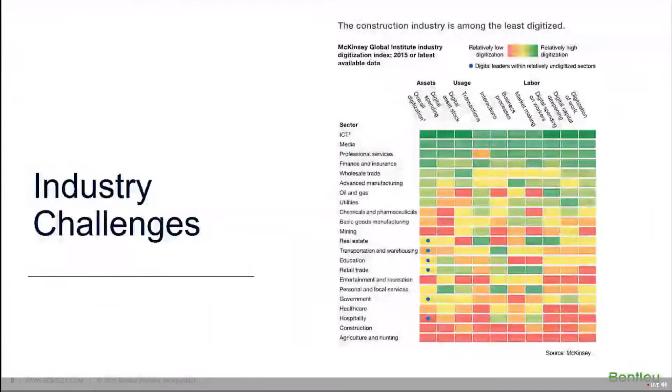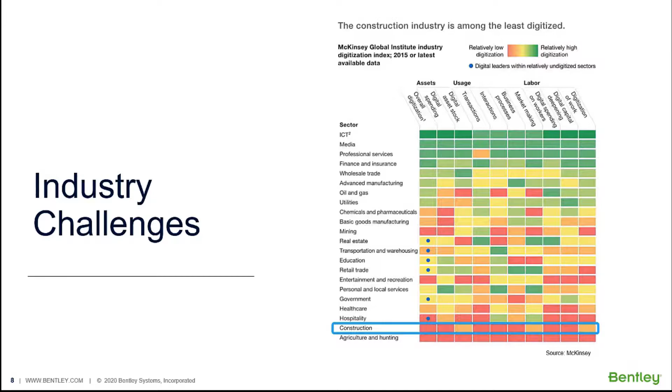The construction industry has been slow to adopt process and technology innovations and is ranked 21st among the 22 industries surveyed. The industry has not yet embraced new digital technologies that need upfront investment, even if the long-term benefits are significant.

Construction spending accounts for 13% of the world's GDP. It is believed that the lagging construction productivity costs the global economy $1.6 trillion a year, which is half of the world's infrastructure need. This means we could create double the infrastructure with the amount being spent.

How do we transform productivity and project delivery? Can technology help? In a report published by McKinsey, 5 big ideas are being talked about. Let's look at the ideas which are being touted to increase productivity.

The first one talks about the higher definition of surveying, which essentially includes photography, laser scans via UAVs to improve accuracy and speed. The second one is about next generation 5D BIM modeling, which considers project schedule and cost in addition to 3D design models. A 5D BIM platform can help owners and contractors to identify, analyze, and record the impact of changes on project costs and scheduling. The next idea is about moving away from the paper towards online, real-time information sharing.

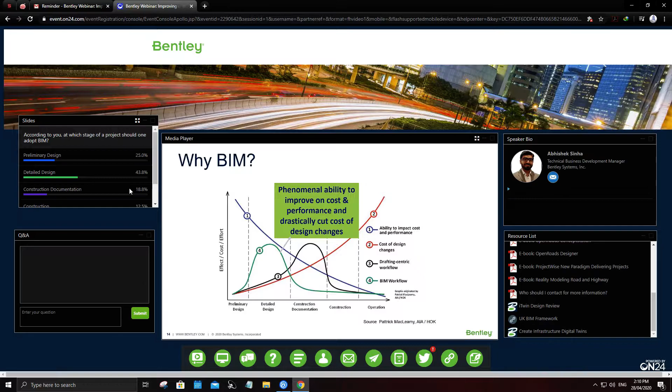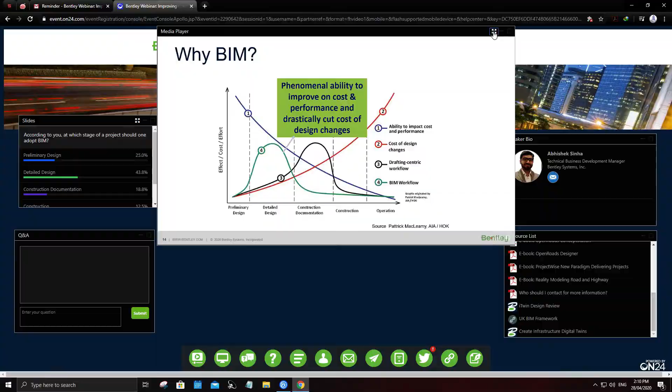To answer the question, which stage of project should one adopt BIM? We have an interesting graphic in front of us. Line 1 shows that if BIM is adopted right from the start of the project, it has maximum impact on cost and performance of the project. Line 2 shows how design changes impact the cost of project during different project stages. The impact is very high during construction and operation stage.

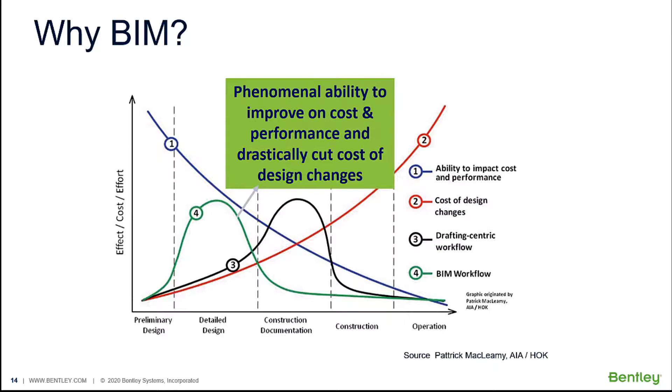Line 4 suggests that adopting BIM workflows helps in identifying design issues very early when the change impact is low, hence adding more value, whereas the drafting-centric workflow is inefficient in risk identification and may result in higher effort and cost. To give you another picture of how it impacts the project cost, let's have a look at how much we can save. Once BIM is adopted right from the planning stage, it can result in a 20% saving in overall capital cost and up to 80% of operational cost. This means 2 projects in the cost of 1.

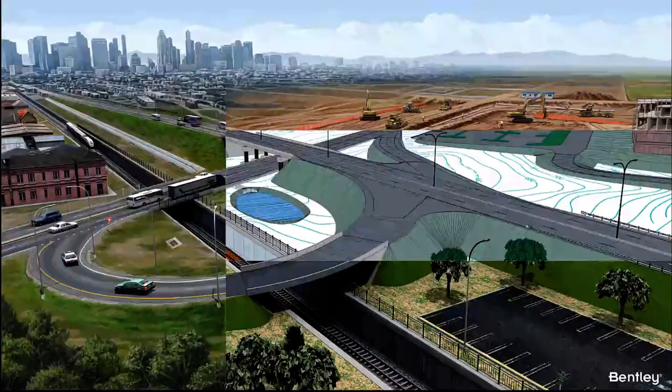This image shows progression of technology over the years. Our industry started digitization of drawings with the invention of CAD, then moved to BIM to gain value out of 3D models and asset information that can be stored within the models. Now we are here talking about digital twin as a successor to BIM. Let us understand what this progression is all about.

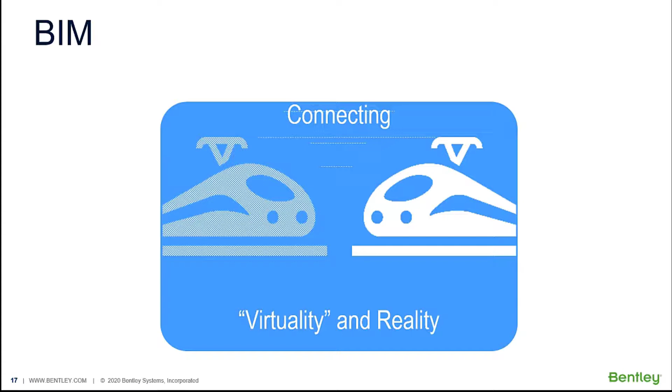When we talk about BIM, most of us understand that it is a 3D model with all the required model information which gets delivered to the client to be used during operation and maintenance stage. Well, it's true in a sense that we aim to create a virtual model before we create an actual model on site. But BIM also defines the standards and process that need to be followed in order to create and mature the information during the project lifecycle.

Digital twin, on the other hand, is a digital replica of the real world model, which means it goes beyond what BIM delivers, and the digital model is constantly updated so that it reflects anything and everything that happens in the real world. It's a dynamic model, a living model if I may say, which adds the dimension of time to the whole story. Typically, digital twins can be synchronized from multiple sources, including sensors and continuous survey, to represent their near real-time status.

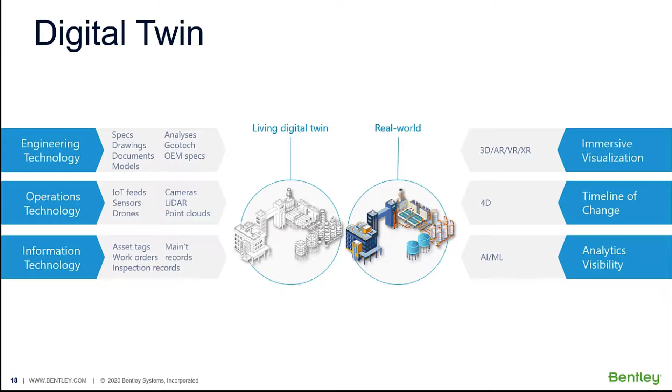Now that we have got the broader picture, let us understand how the BIM process helps in streamlining projects. During a traditional project delivery, information is created, shared, and managed in silos, and there is no single source of truth. This approach results in wastage of time and efforts to find the most relevant and up-to-date information at the right time. A digital project delivery system would solve that problem by using a Common Data Environment, or CDE, as a central repository, which has all the information and is a single source of truth.

Multiple stakeholders can create, modify, and use information from the Common Data Environment and collaborate, which improves overall efficiency. Let's look at the CDE process. During any project, information is created by multiple individuals, teams, and organizations using a variety of tools. CDE captures all that information in a systematic manner and then federates it to create an overall picture of the project. This federated model can then be validated to check for correctness and accuracy of the information created before it is published. All this while, CDE allows the stakeholders to collaborate and refer to other information in the funnel.

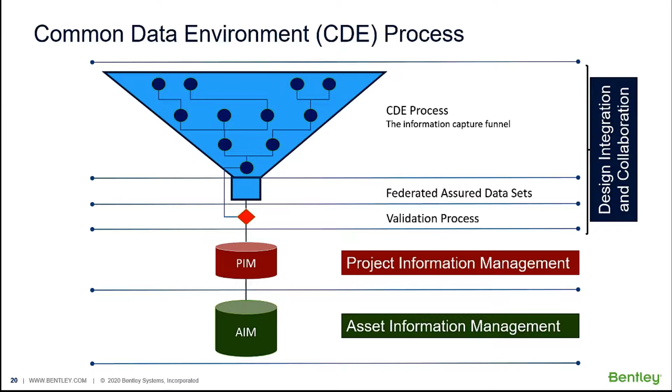Once there is a federated, validated model, it is then published for further processing in the project information management stage. During this stage, the information gets pushed through a defined process, and schedule information and cost information coming from other systems are added to the approved model and then analyzed. The last stage is all about managing asset information, which will help during operation and maintenance of the infrastructure.

UK BIM standards served as a guide for implementing the process we just saw. They talked about information collaboration, electronic data management, CapEx lifecycle management, OpEx lifecycle management, security of the data, health and safety, and better facility management. These standards are now getting superseded by BS EN ISO 19650. There is a plan for 5 parts, out of which 2 parts are already released, covering concepts and principles of BIM and CapEx lifecycle management. The other 3 parts will be published in due course and eventually replace BS standards.

Now that we have talked about standards that shall be used for BIM, let us have a look at the process in detail to understand how it works. Design integration, as you remember, is the first step of the CDE process, and it happens in 3 stages. During the work in progress stage, a file is created, worked upon, its content checked by the people within the discipline, and then it gets approved for sharing with others for further collaboration. During the next stage, other teams collaborate and review the project in totality to check for any possible clashes or risk, and once that is done, it is approved to be published and becomes the final deliverable to be shared with clients or external reviewers.

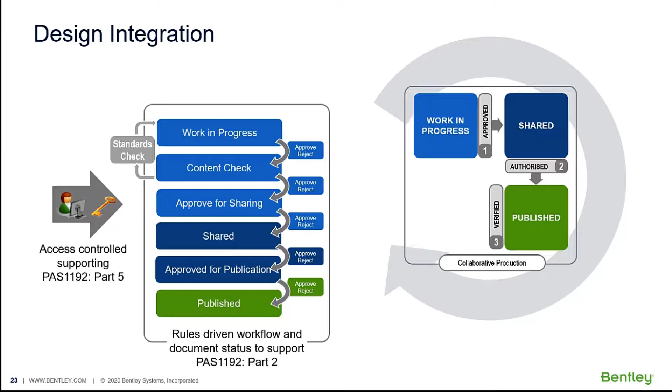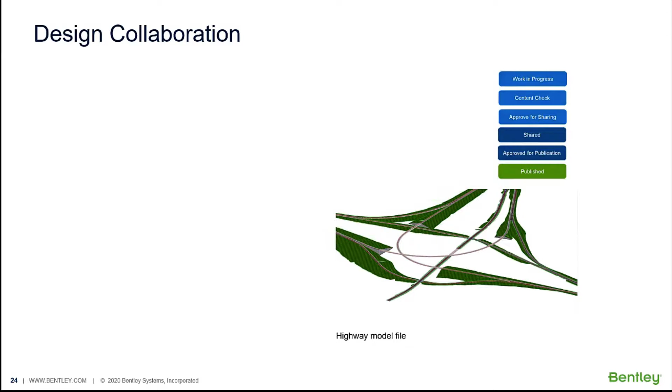All this while the data is access controlled, which means only read-only copies are shared with others for visualization and review purposes, and the owner of the file retains complete rights over the information created. Each discipline follows the same process, and CDE enables multidiscipline teams to then collaborate in a seamless manner. CDE ensures that the organization is able to follow a set standard. The engineering coordinator within each consultant organization collaborates various discipline outputs, which are geo-coordinated and federated to eliminate any surprises during the construction stage. This is where the model is reviewed and checked for clashes before publishing it for client review.

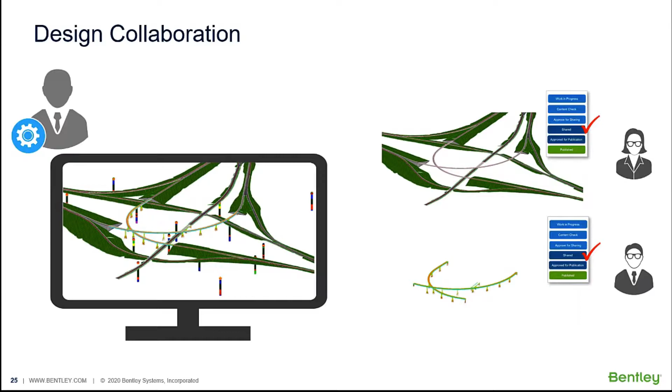The entire design integration, collaboration, submission for review and approval process happens within CDE. This here is an example of this process and can be configured as per the organization's requirement. The file gets created in the CDE and the designer then works on it. Once the design is done, the document moves through CAD checks and design review, and if it gets rejected at any step, it goes back to the owner of the document, which is the designer. Once approved, the model goes through rendition, where it gets converted into a read-only copy, either PDF or iModel or any other common exchange format, for review and comments.

The document controller of the production team will then package the documents and send a transmittal to the external review team. The document controller of the external reviewer team will then acknowledge receipt of the transmittal and share the documents with the lead reviewer, who in turn can share it with the relevant reviewers of his or her organization, and then collate all the feedback together. This commented document is then shared back with the production team to make necessary changes. This process will repeat till the documents are approved and then shared with the authority or the authority's engineer to get final approval.

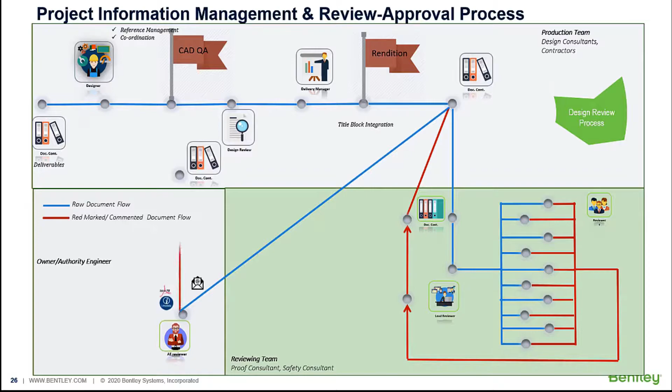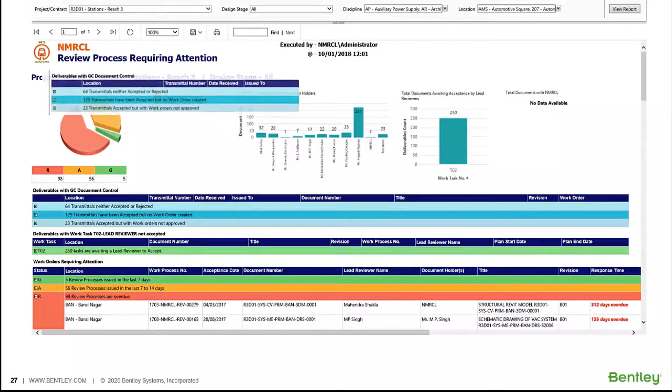Since the information is created and managed in a digital environment, project managers can get easy-to-use dashboards to keep track of project health. This example is from a metro project where CDE is implemented, and such dashboards and reports are helping in understanding the stage of the project at any given time.

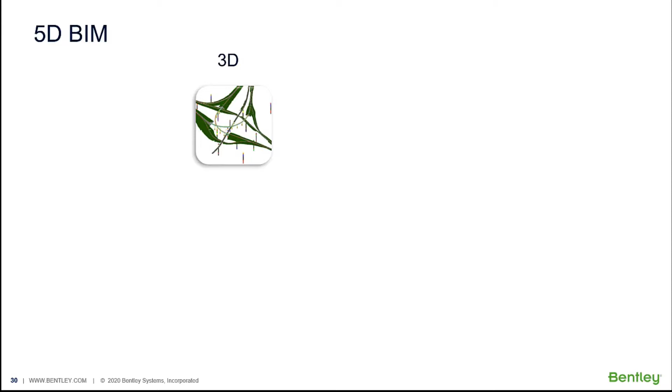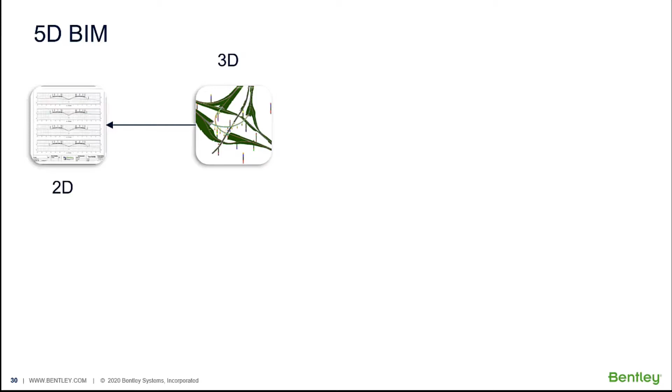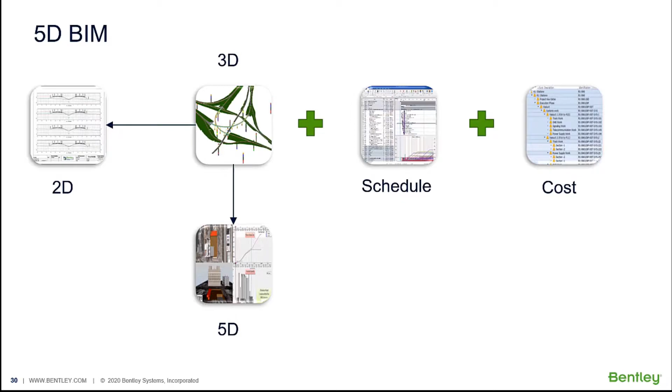Remember, one of the ideas that we discussed earlier was 5D BIM. We have already seen what the BIM standards are and how the process looks like. Let us have a look at how we achieve 5D. We start with 3D models of individual systems, create 2D deliverables, and federate and validate the 3D models within the common data environment. We can then add construction schedule from software like Synchro and Primavera, and cost from the organization's ERP system, to arrive at a final 5D model — time and cost being the fourth and fifth dimension.

Let us now have a look at the design integration and collaboration process in context of a highway project. We will explore a comprehensive set of design solutions and an integrated workflow for highway projects, ranging from surveying to visualization. All this design and review work happens within the common data environment.

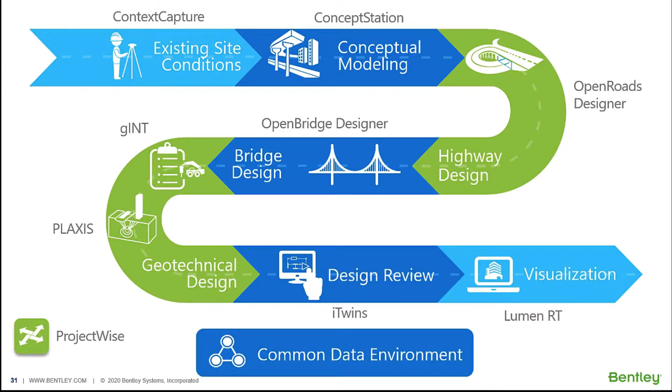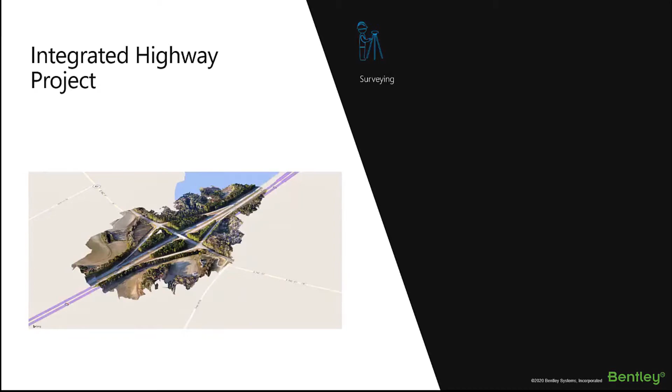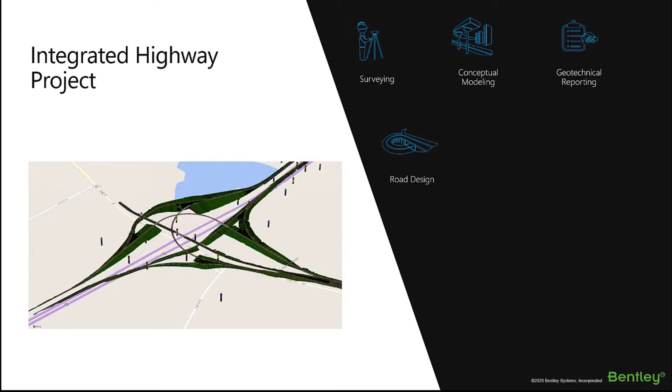We have created an integrated highway project to take you through the entire design lifecycle of the project. We have started by surveying a project site, then creating conceptual project models during the planning stage, taking it through the detailed design stage where we design highway and bridges. We also capture geotechnical survey information and then use it to analyze embankments and pile foundations.

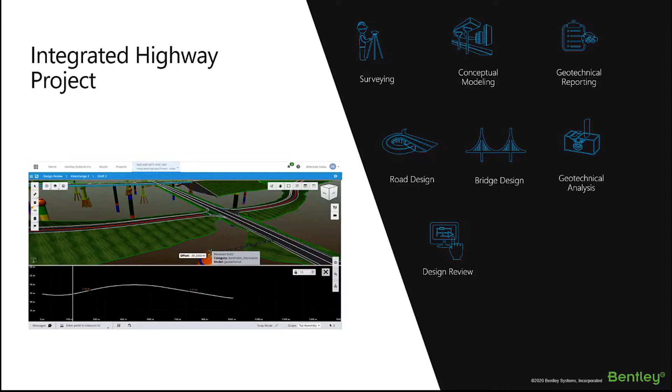Once the design is complete, we review the models and visualize the project. We have also set up a common data environment which will be used by respective engineers to work, and will give you a real feel of how the project is executed using CDE.

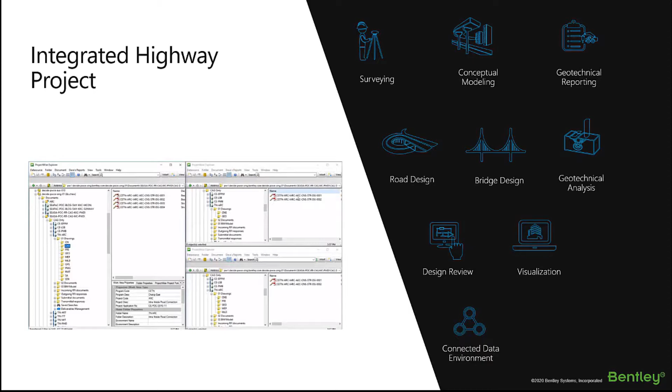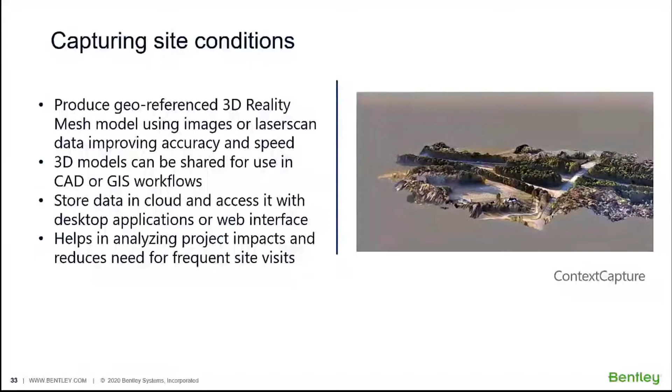During the surveying stage, we can capture photographs of project sites or do a LiDAR scan using drones. We can also use car-mounted or handheld devices. This data can then be processed in Bentley's ContextCapture software to generate a 3D reality mesh model. Since the devices are able to cover more area in less time, we can improve the accuracy and speed of the entire process by using this modern surveying technique.

The 3D reality models can be used in downstream engineering applications as a topo surface and to provide the designer with the contextual view of the project site, thereby improving design decisions and reducing errors.

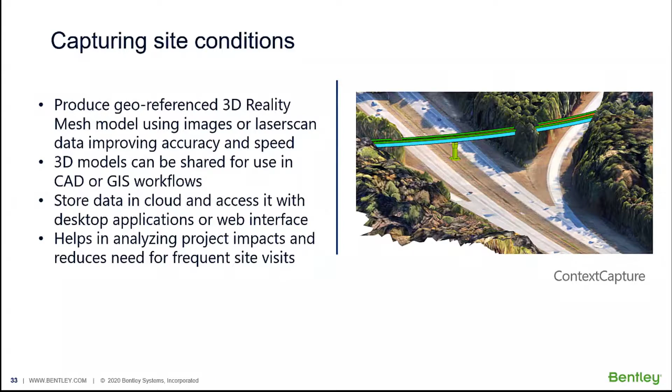We understand that such survey data can be huge, and it is not feasible for everyone to download or copy the file onto their computer systems. Bentley provides a cloud sharing option where the context data is stored on the cloud and can be easily accessed via web browser for viewing, or can be referenced in design applications without the need to download.

Since the engineers will be designing in real site context, it is easier to analyze the design impacts on existing infrastructure and check for any possible clash with existing elements on site. This also reduces the need for frequent site visits to take critical design decisions and can help in saving time and money for the organization.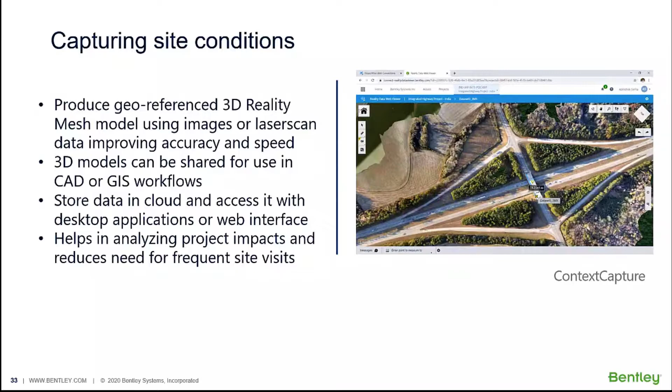During the preliminary design stage, we need to create multiple conceptual design alternatives and quickly compare costs.

OpenRoads ConceptStation allows you to conceptualize your highway project in 3D. The program allows you to download survey data for your site location or use your own survey data, including the ContextCapture reality model you just saw. Being a conceptual design software, it has easy-to-use tools which create parametric highway models.

It also helps in quickly designing challenging sections of a project, for example, a road junction or a ramp connection. It also allows one to place bridges on the fly by just selecting the start and end chainages of the alignment.

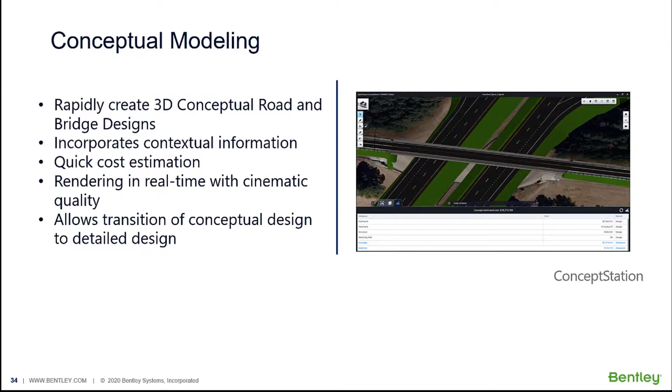Once the bridge is placed, one can easily modify the individual components to suit the design needs. Since the model is in 3D, the software can also provide a quick cost estimation for the entire project, and the designer can check the feasibility of multiple alternatives.

A conceptual model may also be required for client presentations, meetings, or getting approvals from authorities. ConceptStation allows use of the visualization tool LumenRT to create rendered images and animated videos.

Transitioning the conceptual design to the detailed design stage is a huge challenge for DPR consultants or owners' designers. ConceptStation allows the design to be exported to detailed design software so the highway engineer can start finalizing the design alignment without skipping a heartbeat.

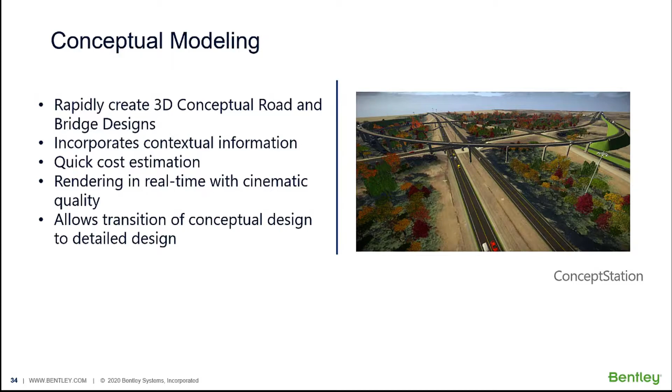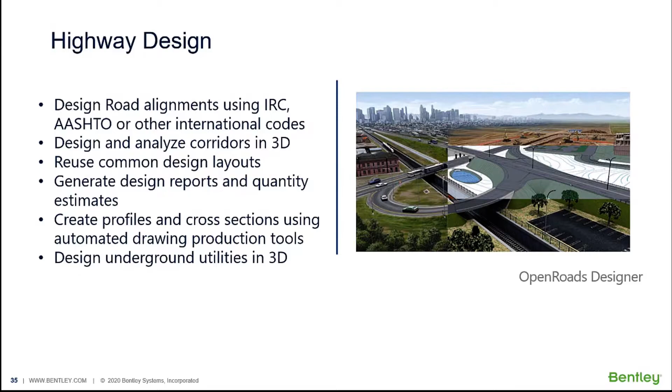Next, we move to the detailed design stage of the project, where we design highways, utilities, bridges, and do geotechnical analysis. It all starts with the alignment finalized during the preliminary design, and the same alignment can be further detailed.

In OpenRoads Designer, as an engineer, you will have to follow design codes based on the country your project is located in. OpenRoads Designer has IRC, AASHTO, and other international codes which are frequently used while designing highways.

OpenRoads is also capable of creating the road corridor in 3D using user-defined parametric templates. You may choose to add road markings, crash barriers, or other 3D and 2D elements as required to deliver the project.

One of the key features of OpenRoads is allowing the designer to reuse common design layouts like junctions, truck laybys, rotaries, etc. This saves effort and time required to keep repeating that design throughout the project.

OpenRoads also allows the designer to quickly generate design reports and quantities for all the components modeled in the project.

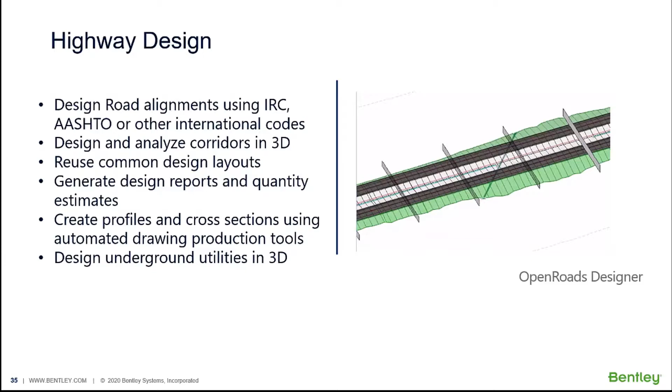2D deliverables are still required for construction activities, and OpenRoads utilizes the 3D model to extract all 2D drawings from it. The benefit of this approach is that the drawings are a live reference of the 3D model, and any change in the model will automatically reflect in the 2D drawings, reducing the drafting time required for making changes.

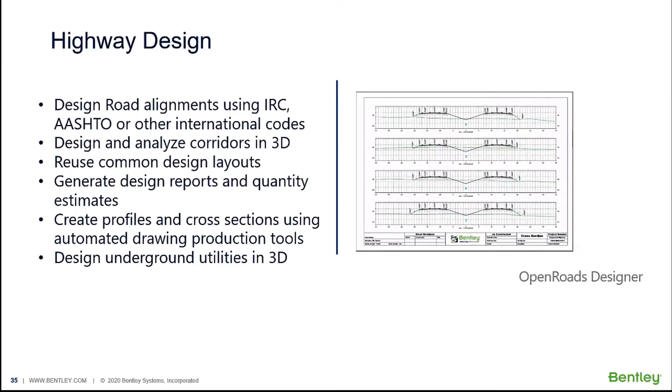It is very common for highway projects to have drainage along the alignment or other underground utilities like water lines and electrical ducts along the roadside, especially in urban sections. OpenRoads takes care of such requirements by including tools to model and analyze underground utilities.

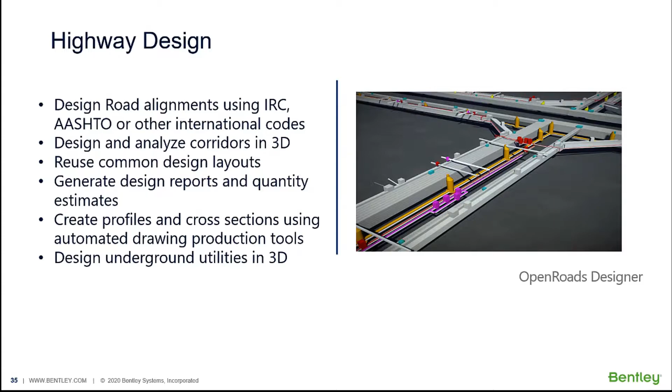One of the major challenges of the highway industry is using the highway design directly into bridge software. Bentley's open solutions integrate it all together. The bridge engineer can reference the road alignment in OpenBridge Designer and start modeling parametric 3D bridge models.

The topo survey can be used to automatically create pier heights, and the super elevation data coming from OpenRoads Designer can be used to slope the bridge deck. You can model the bridge in as much detail as required.

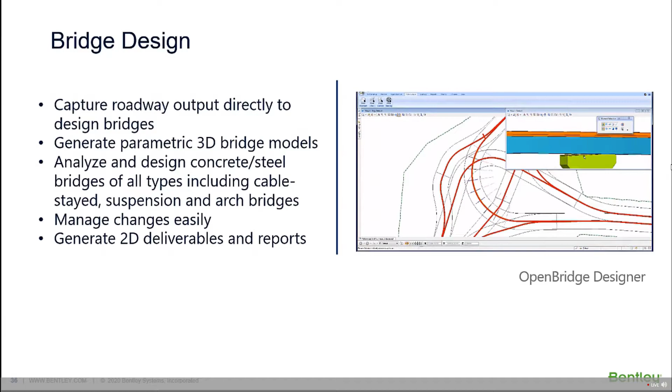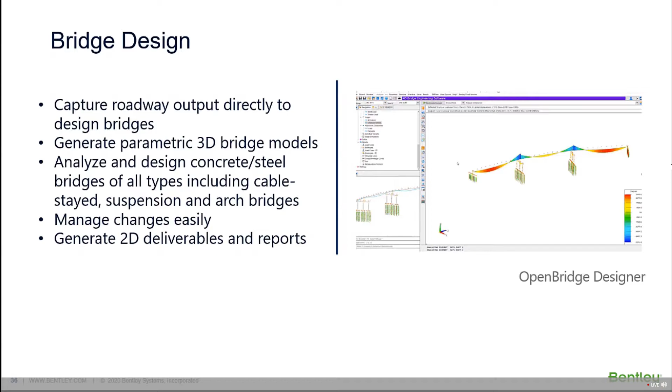Another challenge comes when 3D models of bridges need to be pushed to analysis modules. OpenBridge Designer comes equipped with an analysis module, which helps you analyze all types of bridges, including complex ones like cable-stayed and suspension bridges.

Since the data has a seamless flow from one discipline to another, or from one project stage to another, it is very easy to manage changes. For example, if the highway engineer changes the height of the alignment, it will immediately change the height of the bridge, which can then be quickly reanalyzed to check whether the bridge is still safe.

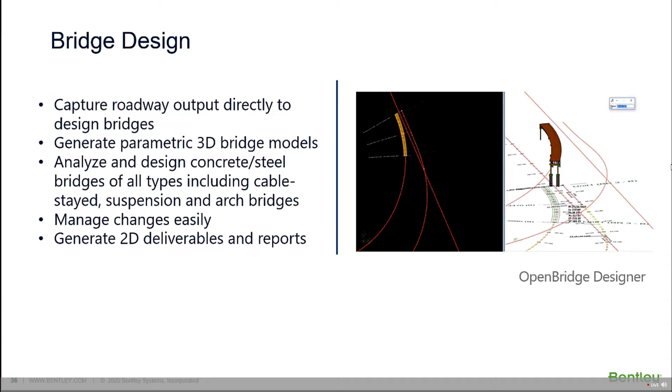OpenBridge also allows you to publish 2D drawings directly from the 3D model, which means any change in the 3D model will reflect back to the published drawings, saving a lot of drafting time.

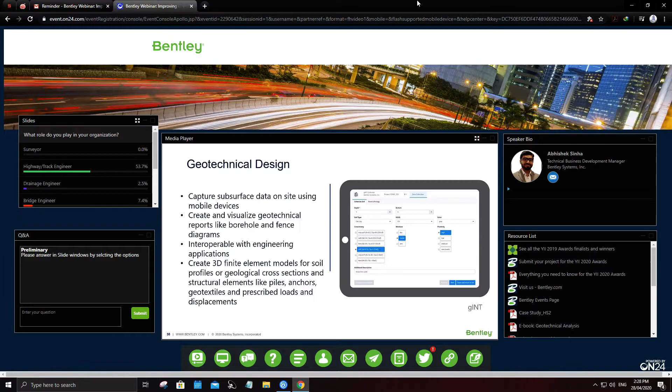Geotechnical design is one of the most critical aspects of any infrastructure project. Bentley has come up with a geotechnical data reporting solution, which allows digitization right from the site level.

The site engineer can record all the information in custom-made forms through a mobile or tablet, which then gets uploaded to the master database at the office. This saves a lot of time transferring data from site to office and removes duplication of work.

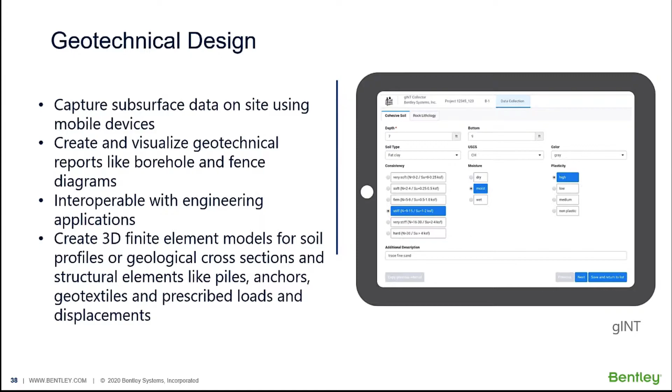Once the data is uploaded to the database, gINT can create geotechnical reports like borehole maps, fence diagrams, etc. This data is also interoperable with design applications like OpenRoads, so the highway engineer can create a surface from lithology data and use it to optimize the alignment and save costs right at the design stage.

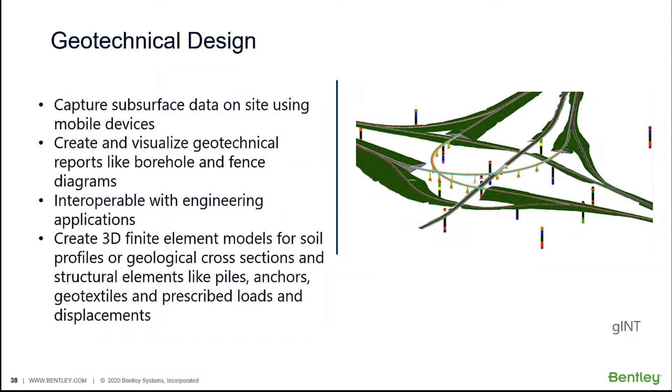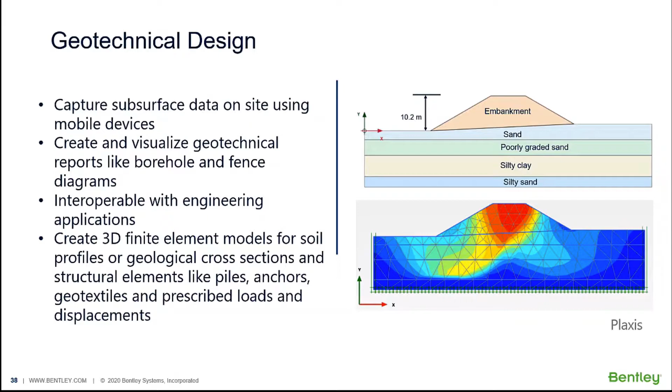Also, with all the soil information captured from site and lab tests, we can then use an analysis software like Plaxis to create finite element models for highway embankments, to check slope stability, and structural elements like pile foundations to check for settlements.

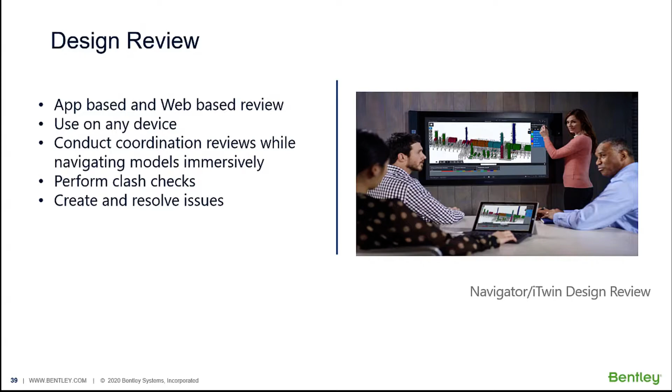Moving on to the next step in the project. Once each discipline engineer creates their own design file, it goes through a review process. The reviews can be done using Bentley Navigator application or through iTwin Design Review, which is a web-based service. Either way, it can be done on any device at any time.

The iTwin Design Review service allows multiple team members from different disciplines to collaborate on their design and perform coordination reviews online. It has the ability to handle third-party design models from most of the commonly used software in the highway industry. In a post-COVID world, this type of online coordination review might become the new normal.

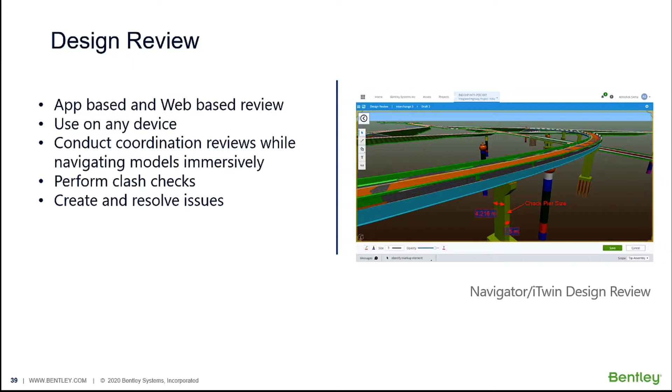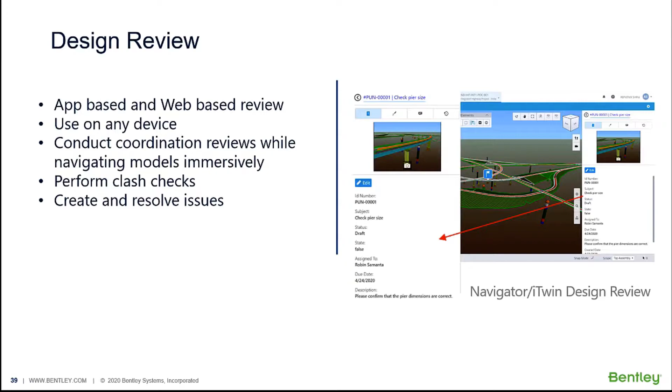Apart from visualizing the entire project, the system also allows one to perform clash checks between different disciplines or components and create issues on the fly, assign them to the respective designer, and maintain the issue register online for better tracking of open issues.

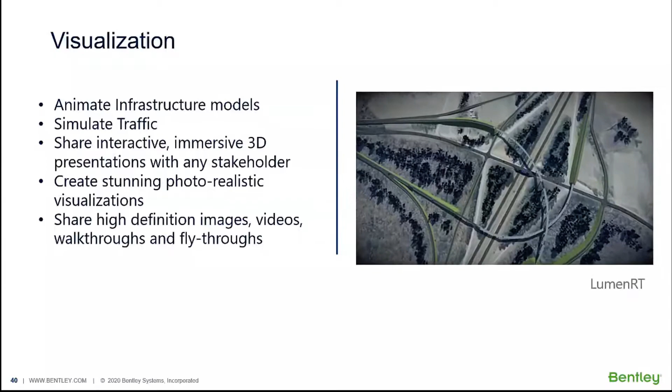Visualization has become very important in today's world, where people are getting accustomed to more and more digital content, and a mere PPT may not cut it. Creating visualization models helps in presenting your work better, get approvals faster, and convey your ideas even to stakeholders who are not domain experts.

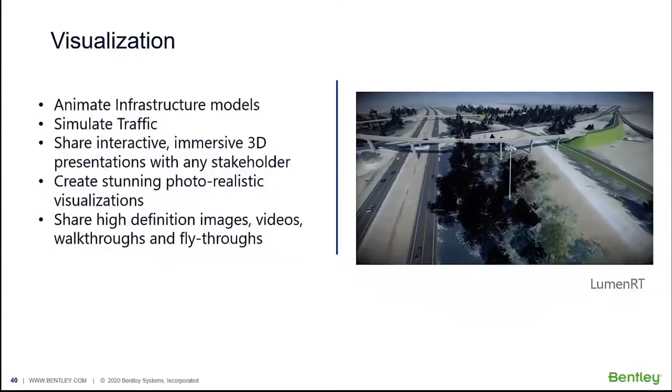Bentley's LumenRT solution helps you animate infrastructure models with ease. For a highway project, you may want to simulate traffic which can be easily managed. LumenRT helps in sharing immersive 3D presentations with any stakeholder and can connect to augmented reality or virtual reality for enhancing the visualization experience. It also allows you to capture stunning images and share high-definition walkthrough and fly-through videos to make your work really stand out.

Now, common data environment is key to streamlining the entire process and standards that we were talking about. Bentley's ProjectWise acts as a secured container with a defined work process for information. It is a single source of truth and provides safe collaboration among all stakeholders with defined access control.

It allows for federation of data in a coordinated fashion with defined geo-coordinates for the project. ProjectWise establishes a common process for all stakeholders across the entire lifecycle of the project. It also manages changes to information and creates an audit trail for evidence. By managing all such menial tasks, ProjectWise allows project teams to spend more time on innovative designs and thereby increases productivity.

Let us summarize the entire design workflow we just saw. ProjectWise CE is set up right at the start of the project and becomes a single repository for all the documents created for a project. It also manages the associated workflows.

Context Capture allows the surveyor to create a reality model of the project site, which is then used by designers to create conceptual models and finalize the project alignment using Concept Station. This alignment is further refined in OpenRoads Designer.

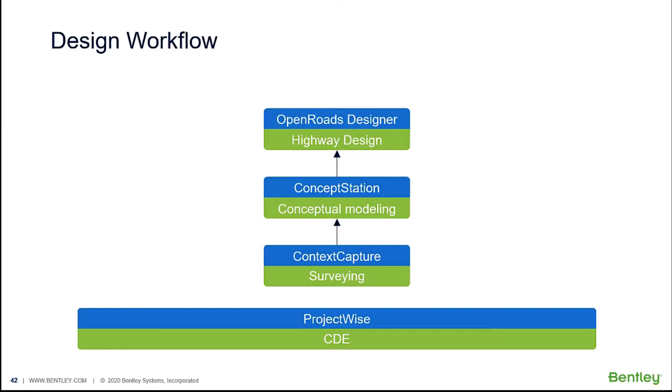3D models and 2D drawings are generated as highway deliverables. This design information is then referenced by the bridge engineer to create 3D models and analyze and design bridges using OpenBridge Designer. It also helps in creating bridge deliverables.

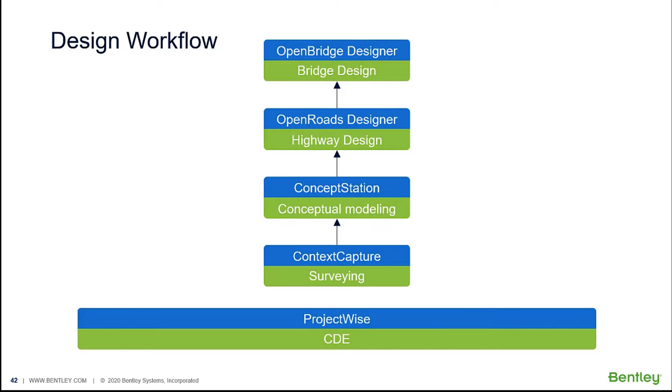gINT helps the geotechnical team capture soil data from the site and labs and report it in a database, which can then be used to create analytical soil models in combination with data coming from the highway and bridge teams.

The final models of all the disciplines are then published to iModel Hub, where the iTwin services can be used to review and validate the models. The final validated models are then taken to LumenRT to create visualizations, simulations, and publish images and videos.